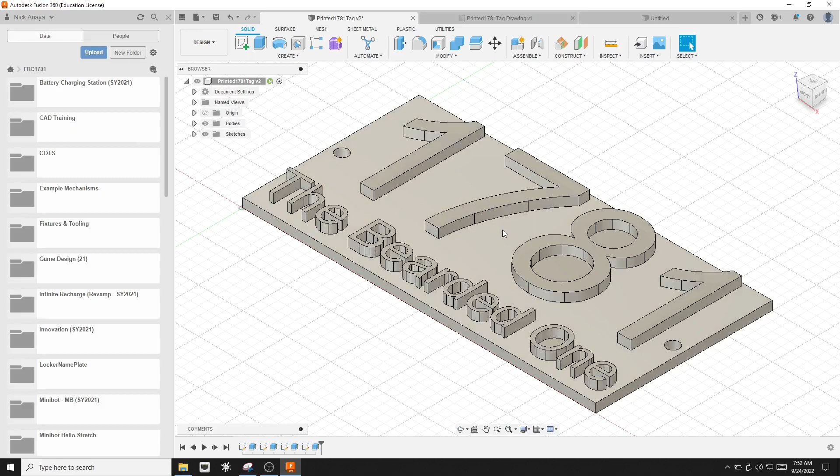This first part, the nameplate, is going to be 3D printed. So we're going to CAD this up and then print it out on the 3D printers, which should be cool.

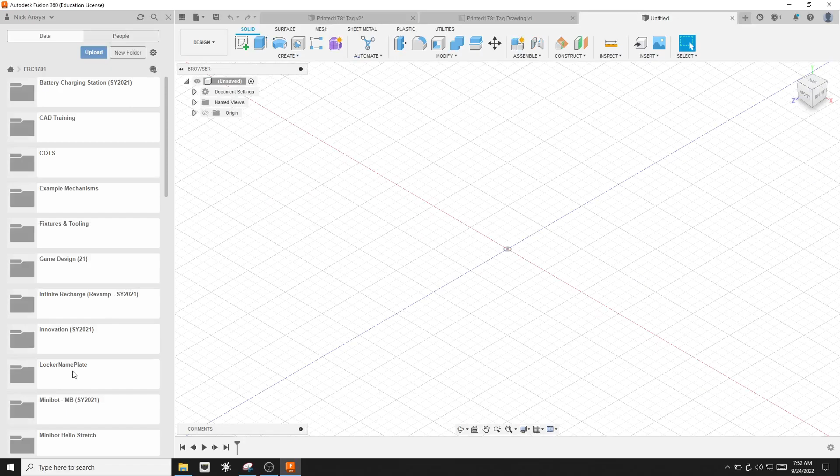The first thing you'll need to do is, if you don't already have a folder, create a folder for your project. Go to New Folder up here, click the folder, and name it something like Locker Nameplate, like I did. Then double click on the folder to make sure you go into it. I'm in the team folder, but you'll do this in your own personal folder.

I've got two files, but I'm going to go ahead and make a new one. Usually it'll be blank for you if this is your very first one.

The first thing on the Untitled file you'll want to check is that we've got our correct units and our correct orientation for the navigation cube. If I check here, I'm actually in millimeters at the moment, and I've got Y up, both of which I want to change.

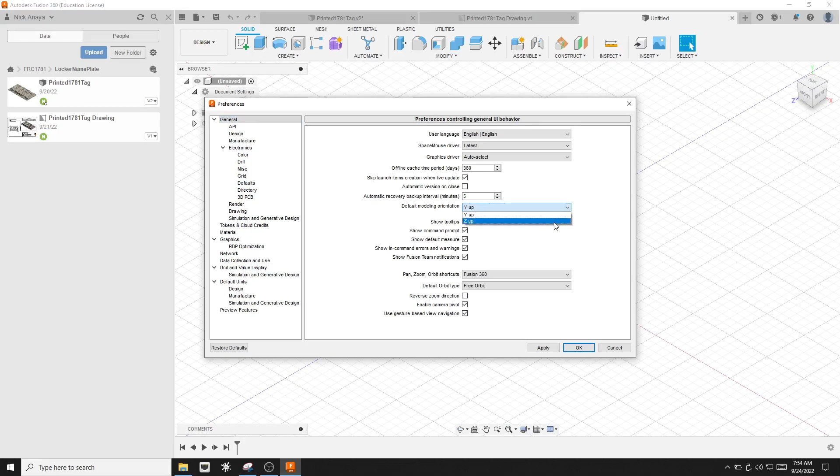I'm going to do this as a global preference. I'll click on my icon in the corner, go to Preferences, and switch this to inches. I was in here before, under default units, so make sure that I'm in inches. It'll probably pop up for you under General, and that's where you'll switch this to Z up, then click OK.

Now these attributes won't take effect on this particular Untitled file because it's already open. But if I close that and make a new one with the little plus sign, it's going to default into Z up. And if I look at my units, it's in inches now.

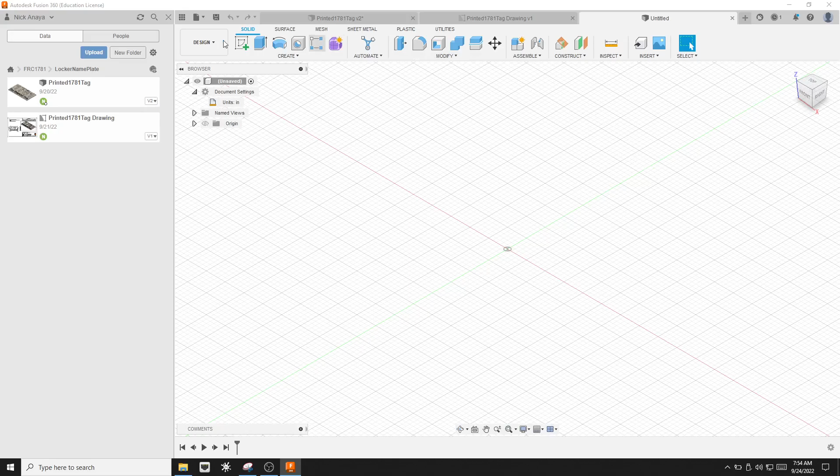So to start off, we always begin with a sketch, then extrude, then repeat. I hit new sketch, pick this lower plane, the XY plane, and select it. Then we select our rectangle tool and click on the origin.

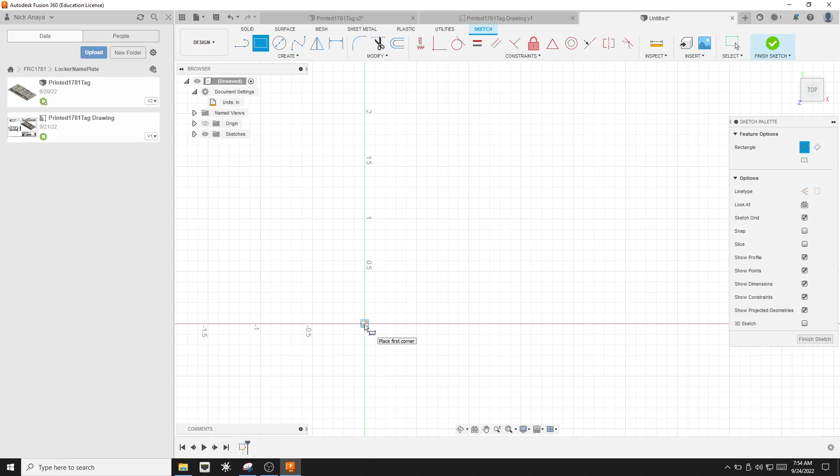You'll notice when I lock to the origin, it shows a little square. I click on that, move up and to the right, then before clicking again, I type my first dimension, 4 inches. Then I hit tab on the keyboard and type the second dimension, 2 inches, and hit enter. You'll notice the edges of my rectangle are all black, because it's fully constrained.

If, for example, I had forgotten to do the 2-inch distance before I clicked or hit enter, then I'd have a blue line for part of my rectangle. In that case, I'd go to dimension, click on the blue line, click on the black line at the bottom, then click on the left. It's already sitting at 2 inches, but it could have been something else, so I'd just type 2 and hit enter.

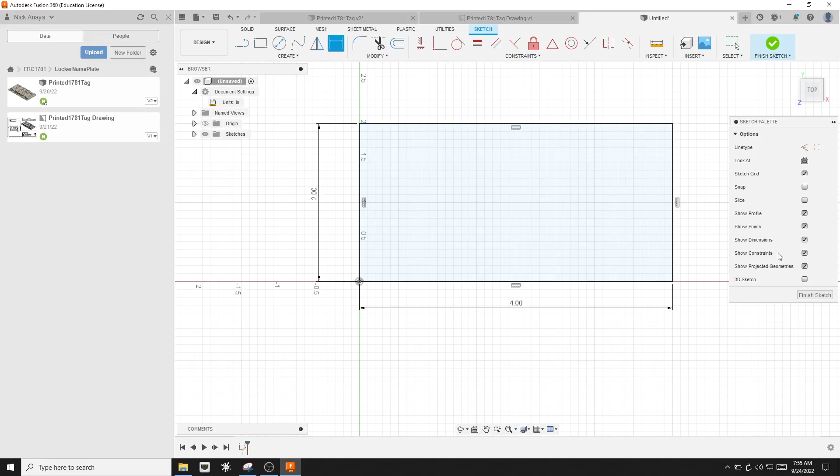After that, I'll finish the sketch. I'm going to go back to my home view, and then extrude using the extrude tool, pulling this up 0.1 inches. Then click OK.

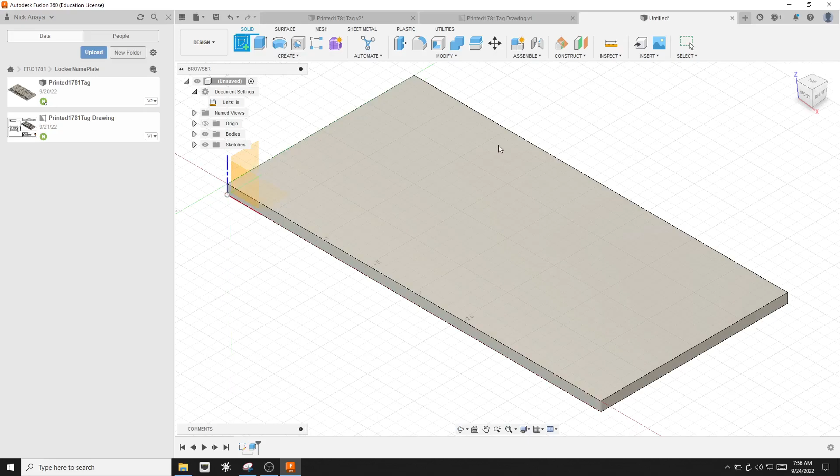The next thing I'm going to do is create the 1781. Click on that - you'll notice that we flipped 180 degrees upside down. I'm going to correct that using the navigation cube. You don't have to - you could technically draw it all in a different orientation, it's not going to matter. But I'm going to keep my origin in the lower left-hand corner. It's worthwhile knowing that you can spin your drawing with these two little arrows in the corner.

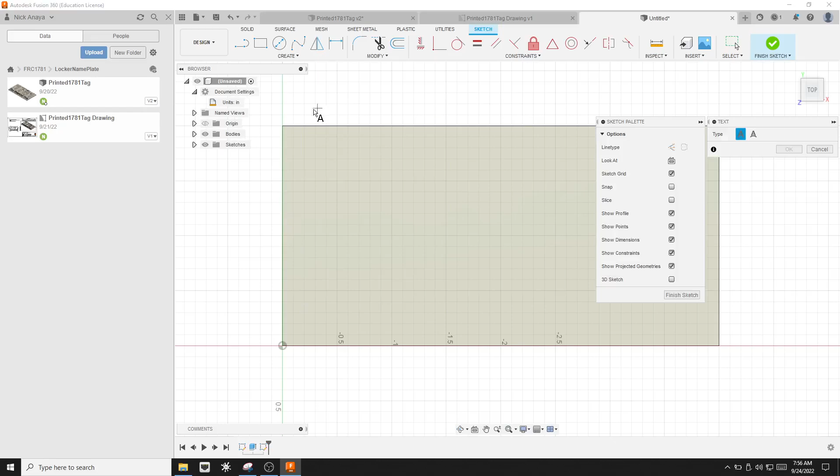Once I've done that, I'm going to click Create and go down and select Text. I'll zoom out a little bit, then click in the upper left-hand corner to get the square that locks. Then I move down and to the right until I lock to this right edge, and go about three-quarters of the way down and click again.

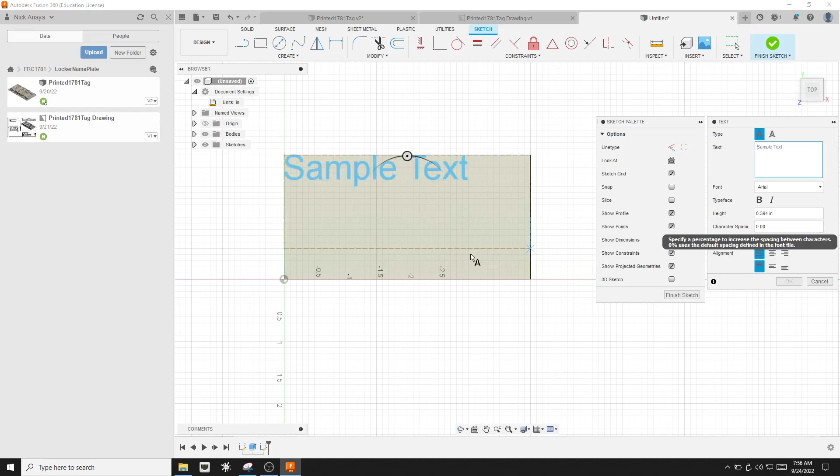Once I've done that, it'll pop up with this sample text. This is where I'm going to type 1781. Then you can select your font if you'd like and adjust that - I'm going to just leave it at Arial.

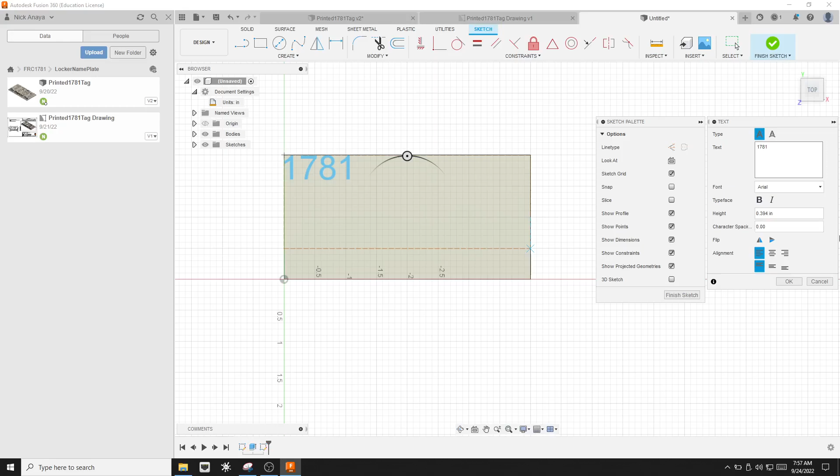The next thing I'm going to do is change the height of my letters. I want these to be about 1¼ inch tall, so I delete that and type 1.25. Now my 1781 is much larger.

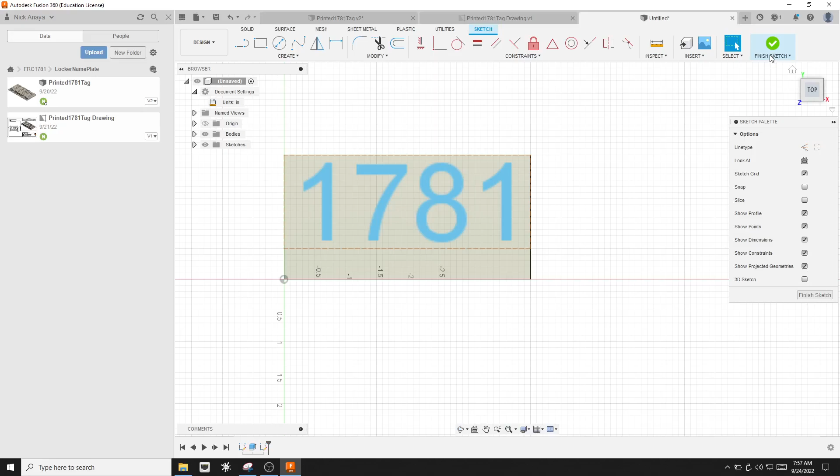Then I'm going to change the alignment - I want to do center align so that it's centered, and align middle so that I'm not all the way at the top edge. Then I click OK, and I've got my 1781 sketch. I click Finish Sketch either down here or up here, and go back to my home view.

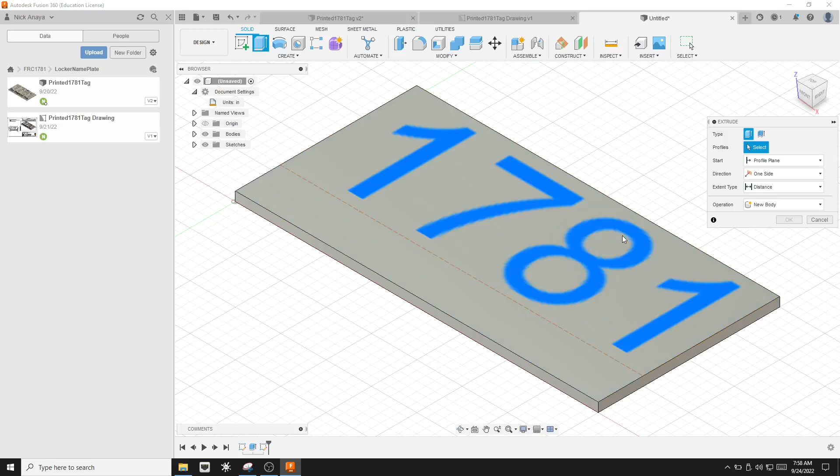I'm going to go ahead and pick Extrude again. You'll notice it immediately selected the whole plane, which is not what I want, so I'm going to unselect that using that little X. Now I'm going to hover over just to get the 1781 part and click on that, then lift this up another 0.1 and click OK. So now I've got 1781, my letters.

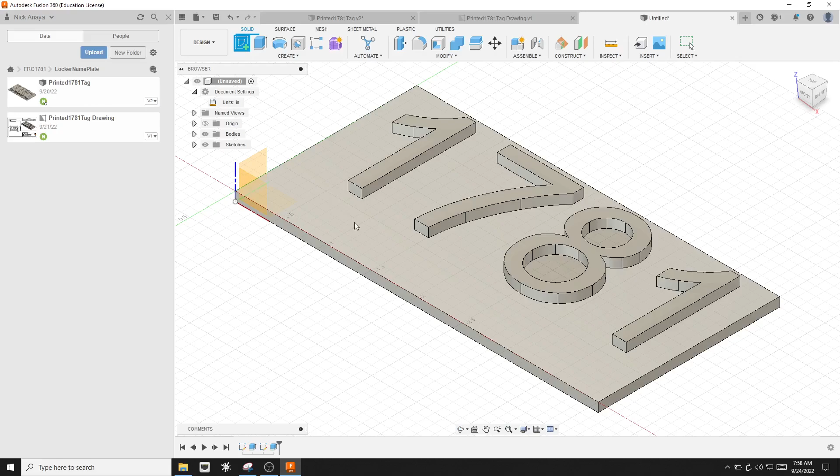The next thing I'm going to do is another sketch. I'm going to select the bottom edge, and in this case flip around the orientation. Now I'm going to go ahead and select text again, go to the origin this time, lock onto the origin, and then come up to that same little point over on the right hand side, and click.

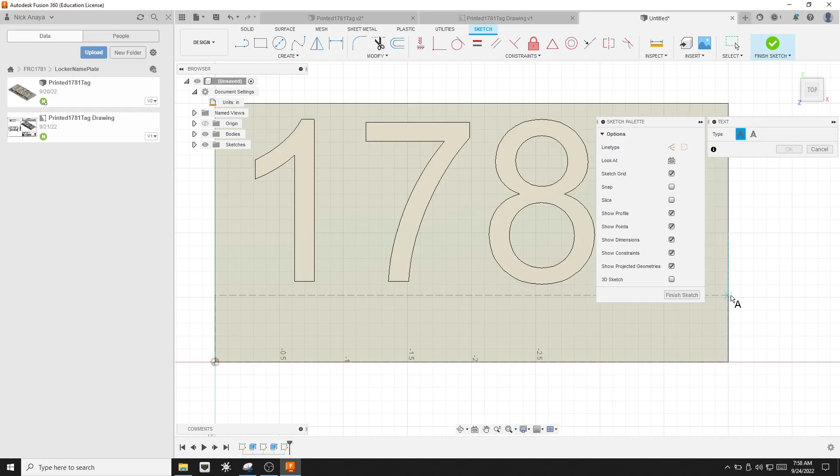Now for this text, it's going to default to my last settings, so I'm going to end up changing those. The first thing I'm going to do is type my name, or a nickname or something, whatever I want on the plate. So I'm going to go ahead and type 'the bearded one.'

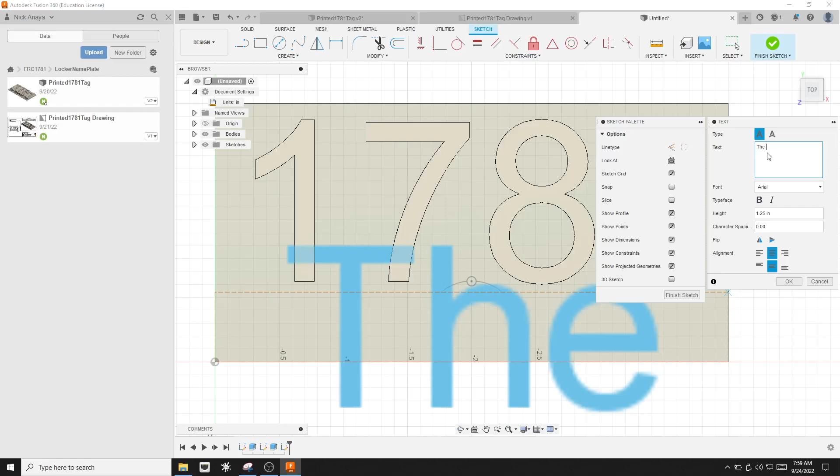Now I'm going to change the font size and go ahead and go to like 1/4 inch, and then I see like, oh, I could actually make this a bit bigger. So I might adjust and say, well, I can fit it if it's 0.35. So in this case the name fills up that space pretty nicely, and it's center aligned and such, so that looks pretty good.

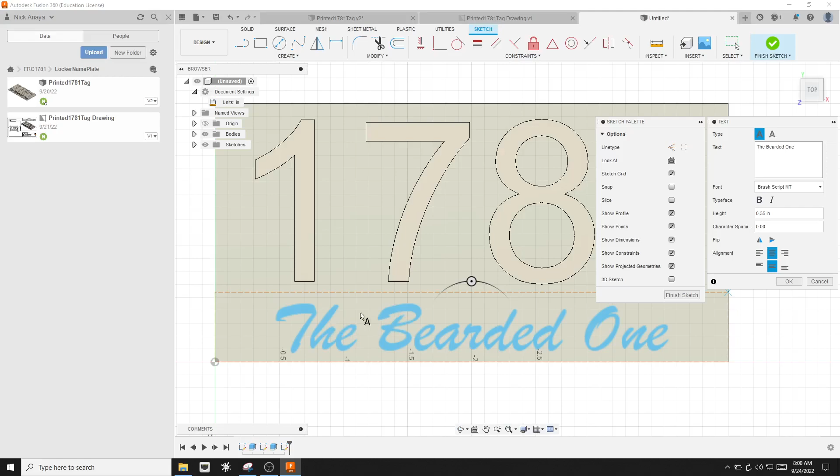If I wanted to, I could go ahead and change the font that I want my name to be in. Let's say, go to some kind of brush script, for example. The one thing you've got to be a little bit careful about is that the printer can only do so much detail, and if you have a little bitty arc like this, it may not actually print. So in this case I'm going to go back to just regular Arial and not mess around with the other fonts.

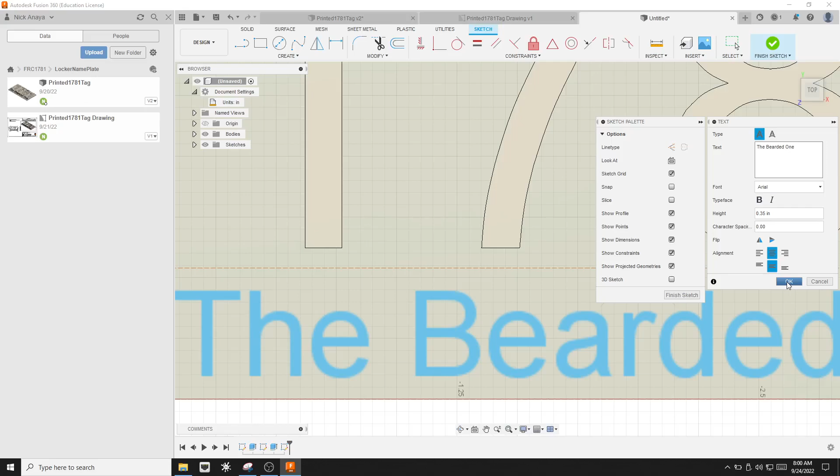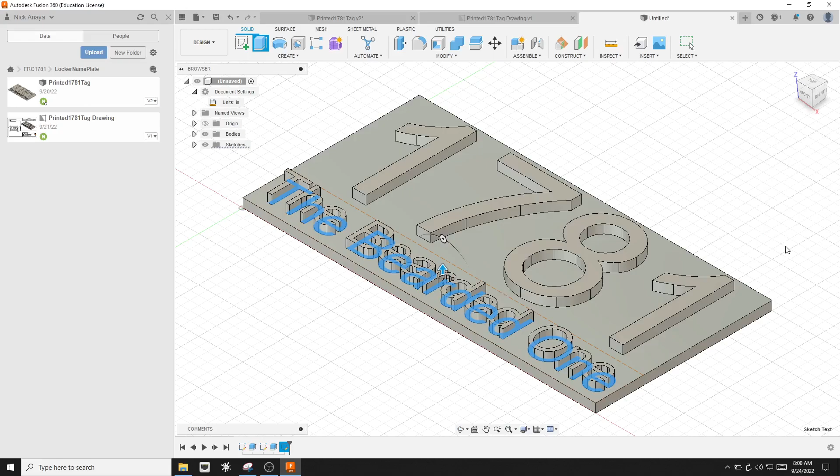I'm happy with that, and then I'm going to go ahead and click OK on there and say Finish Sketch. Go back to my home view and now extrude. I'm going to hover over the letters, click on them, pull the extrusion up 0.1, and click OK. Now the last thing we're going to do is add the holes for this.

So I'm going to start one more sketch, click on the top face of the plate, and this time I don't really care that it's upside down because I'm not typing anything. The first thing I'm going to do is create construction lines so that I have a midpoint. So I'm going to click on my line tool, go over to my dialog box, and select construction.

Once I do that, when I go to the middle, I know I'm in the middle because it locks and gives me that little triangle icon. I'm going to left click, go across, find the middle point on the other side, and left click again. Because this is a construction line, it's actually just a dotted line instead of a solid line. So then I'll go ahead and be done with the line tool, and go to my circle tool.

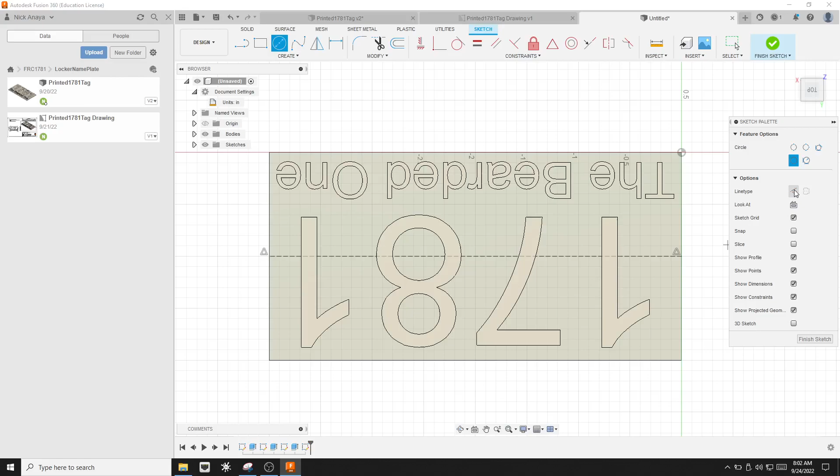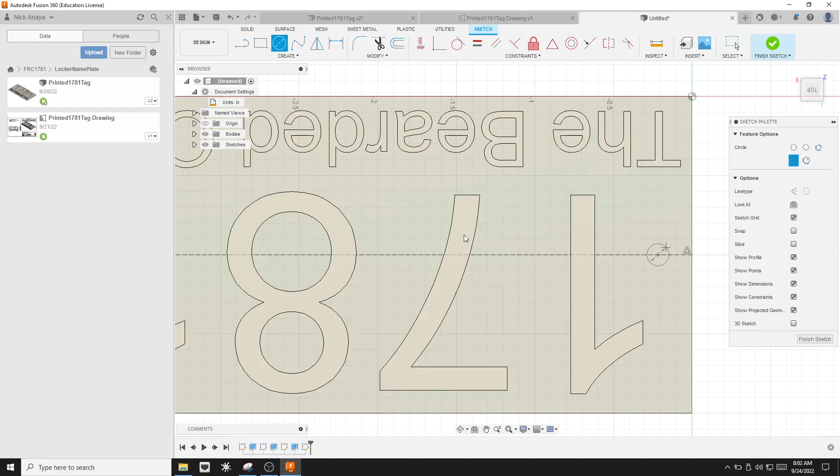Now I want to actually make these holes, so I'm going to turn off construction and click over here to make a circle. For the circle diameter, I want a through-hole clearance hole for a number 6 screw. So I'm going to type 0.14 and hit enter. Then I'll go to the other side, click again, and do 0.14, enter.

Now you'll notice these little circles are still blue, and that's because while the center of the circle is locked to this line and I've given the dimension, I have not actually constrained it horizontally. So I'm going to go to my dimensions, click on the center of the circle, click on the right side, back it to the edge of the circle, and move down. In this case, I'm going to do 1/8 of an inch off the edge, 0.125, and then hit enter.

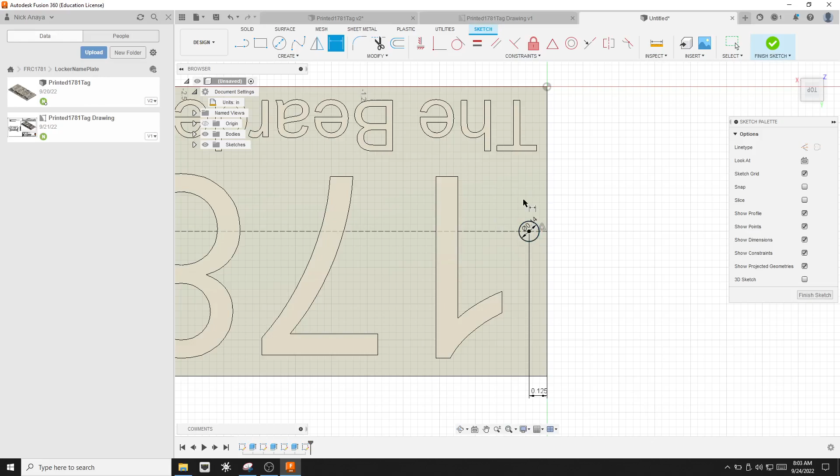And it's going to move it to that edge. Then I'll go over to the other one, edge of the circle, sideline, drag my dimension off of the object, 0.125, enter. And then I can finish the sketch.

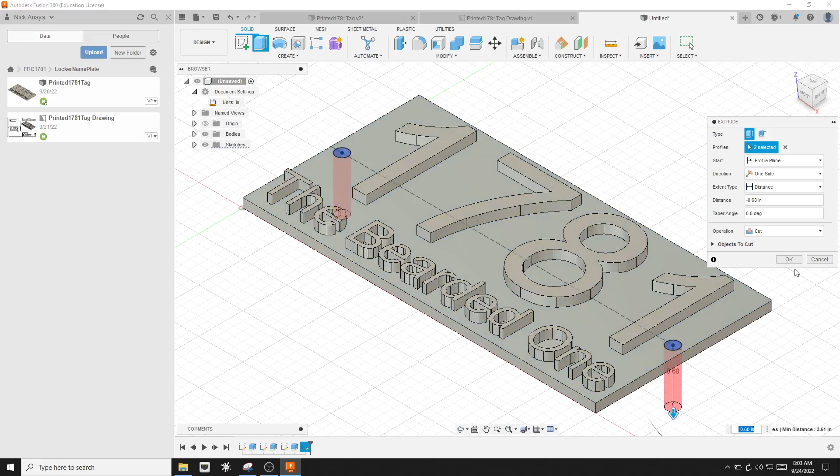Back to home, extrude. This time I'm going to select both little circles, clicking on one and then coming over to click on the second one. Then I'm going to grab the little arrow, and instead of pulling it up this time, I'm going to drag it down, which should cut holes into the object. So I click OK, and now if I look from the top, I can see the holes that go through, and everything's looking nice. So from there, my nameplate is done as far as the CAD work.

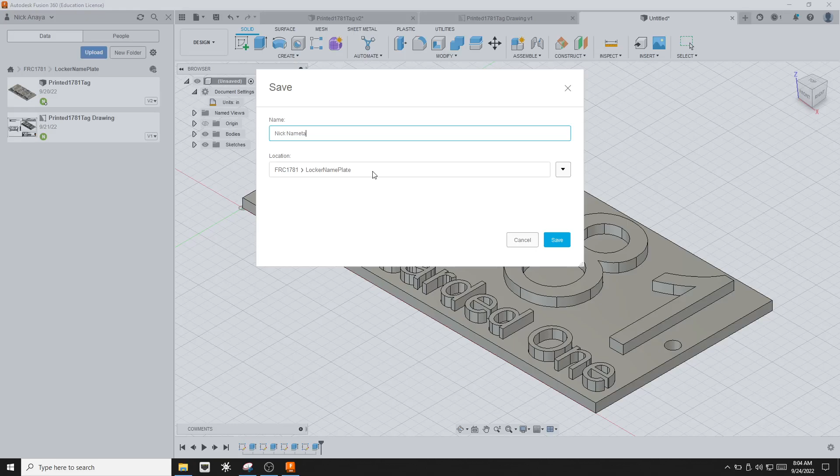So I'm going to go ahead and hit save. I want to give it a cool name, or an appropriate name. Let's say, Nick name tag. And then hit save, and then you should see over in your data panel your item there. And so now you've CAD'd up your nameplate.